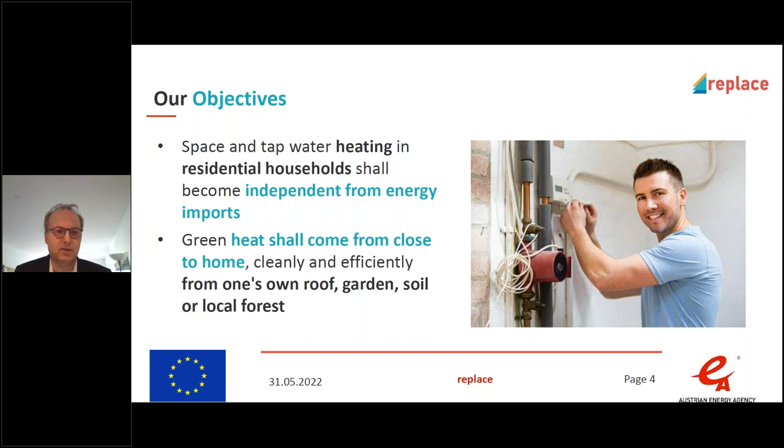The challenge we see is that households need easy access to product neutral know-how to enable them to take informed decisions and to end their dependency on imports.

What we can offer from our project is quite relevant now, because we have an energy crisis and many homes and families are quite worried because of the price increases for the heating supply, and that really affects fuel oil and also natural gas. And with natural gas, there is also a supply security crisis. So what we hear and see is that many families are really worried, and they need reliable information on suitable clean alternatives. They also need information on the costs, financial viability, and on any financial support they can get.

Therefore, our project developed a lot of materials and tools that give advice to enable informed decisions. Here are the most prominent tools and info materials we developed which are already available, ranging from heating matrices to a calculator for techno-economical assessment, which I will show later today. We have handbooks for end consumers and for professionals, and we have a lot of best practice examples from the pilot regions.

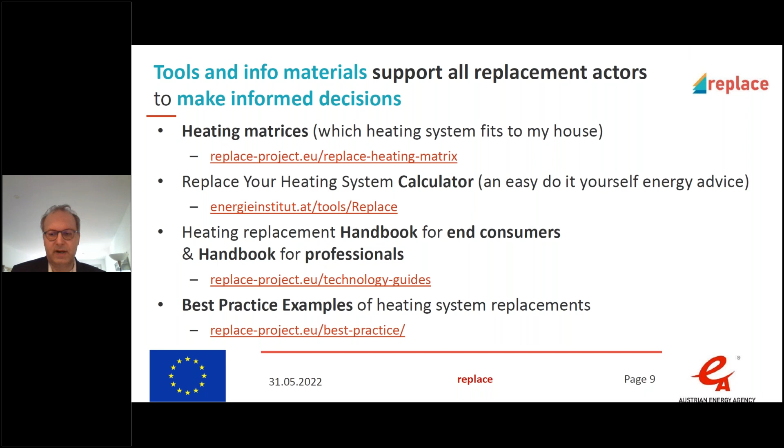Yes, we have 9 pilot regions in 8 countries, and all tools and materials are available in national languages, most of them also in English, meaning translated. These pilot regions have in total more than 8 million inhabitants.

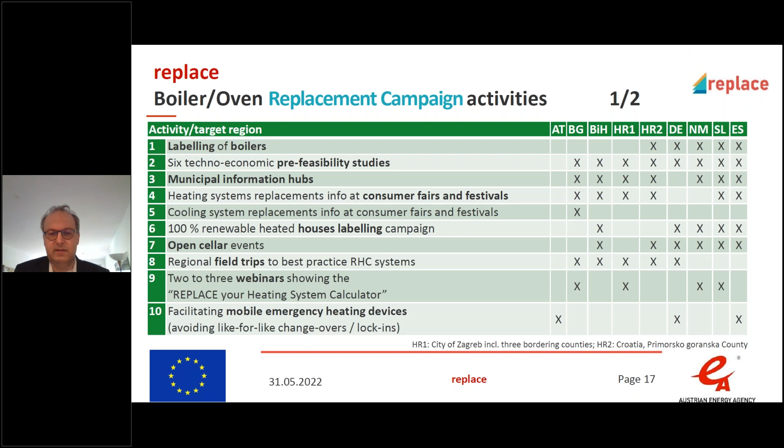We are facilitating mobile emergency heating devices that help bridge over breakdown situations for some weeks, enabling end consumers to take informed decisions.

We also help people develop new business models. Installers can become contractors, or contractors and installers can collaborate with each other.

We have collective actions implemented in all regions, and in Austria we have a one-stop shop for boiler replacement in the province of Salzburg that offers an all-round carefree package for boiler replacement. There are also a lot of other instruments and activities, for example information evenings on municipal level, which is also a good option.

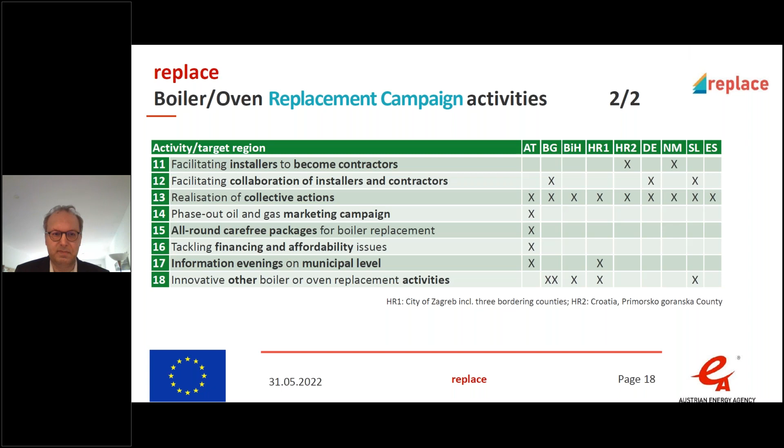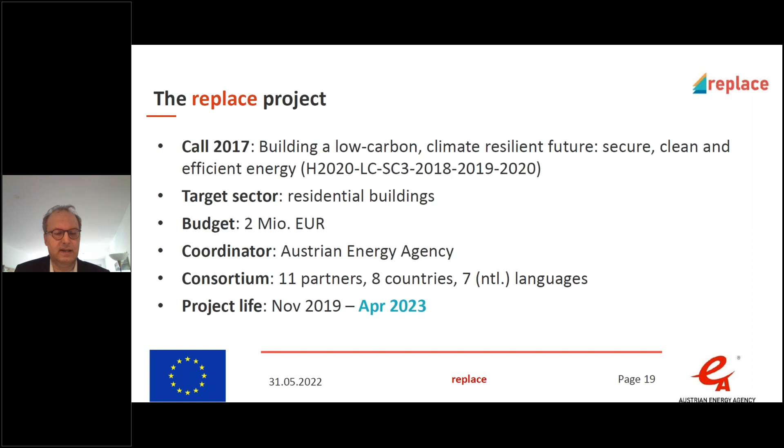Our actions are performed until April next year, and this is what I wanted to show you about what we are doing. I hope you find the workshop interesting and informative. Thank you for your attention.

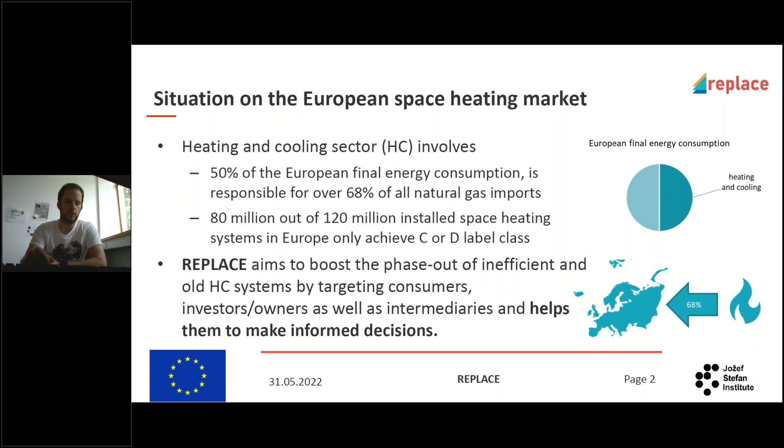The Replace project therefore aims to boost the phase-out of inefficient and old heating and cooling systems by targeting consumers, investors and owners, as well as intermediaries like installers, plumbers and chimney sweepers, helping them make more informed decisions.

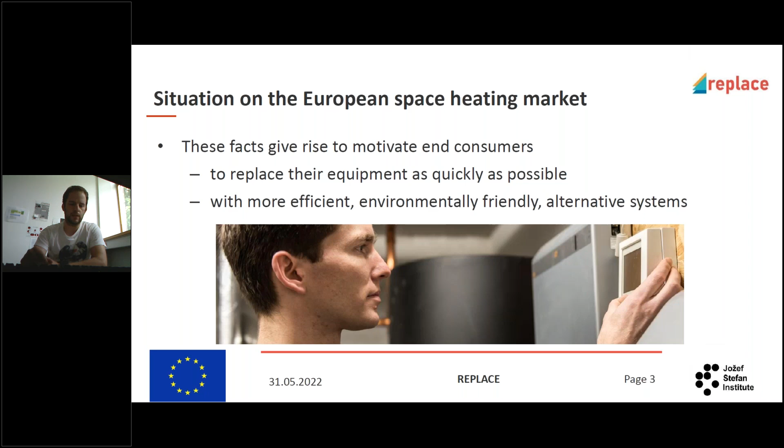Facts regarding the high share of inefficient boilers, the need for fossil fuel replacement, and energy independence motivate end consumers to replace their equipment as quickly as possible with more efficient, environmentally friendly alternative systems. This is the point where the Replace project comes to aid.

The first overall objective of the Replace project is to implement targeted campaigns to make heating and cooling for European consumers efficient, economically resilient, clean, and climate friendly. All activities proposed by Replace aim to inform and motivate consumers to replace their old and inefficient heating and cooling systems with better, greener alternatives, with the benefit of monetary savings and improvements in air quality, comfort, safety, and security of supply. The project focus is on the residential heating sector.

It is coordinated by the Austrian Energy Agency and runs until April 2023. The geographical focus of Replace is in Western, Central, and Southeastern Europe. The consortium today consists of 8 regions covered by 11 partners.

As already mentioned, Replace targets over 1.3 million consumers directly, with an estimated direct impact of 8 gigawatt hours of primary energy savings per year, and a reduction in annual greenhouse gas emissions of approximately 3,600 tons of CO2 equivalent.

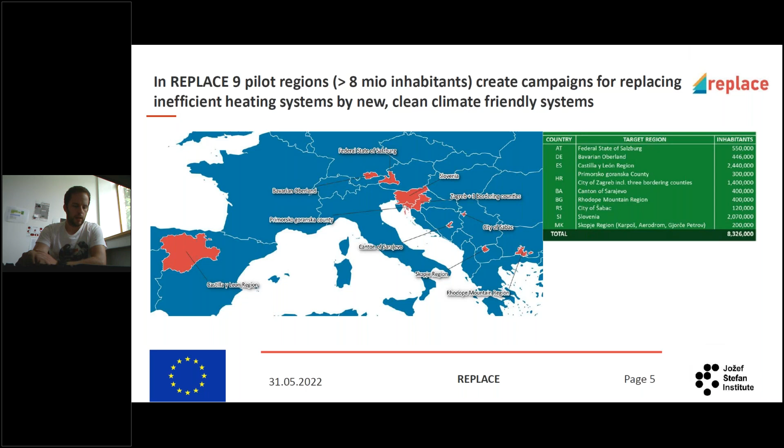To actually transpose the project's objectives during and beyond the project life, every project partner establishes and cooperates with local working groups, which comprise local and national key stakeholders residing in their target region. Key members of local working groups firmly committed themselves by letter of support at the beginning of the project to actively support the implementation of project findings in their target regions.

All consortium participants can rely on their strong local networks and are perfectly placed to steer the work of the local working groups. Key members and project beneficiaries, jointly with other key stakeholders of the local working groups, developed and are currently implementing comprehensive, targeted, oriented replacement implementation campaigns.

One of the most important results of our project are the tools that can be used to aid the decision-making process when replacing an inefficient heating system. The Replace heating matrices provide an initial overview. They show which type of heating system, based on renewable energy sources or connection to district heat, is most suitable for single or double family houses or for larger volume buildings. What kind of system is recommended depends on the thermal quality of the considered building, for example the useful heat demand in kilowatt-hours per square meter per year according to the energy performance certificate.

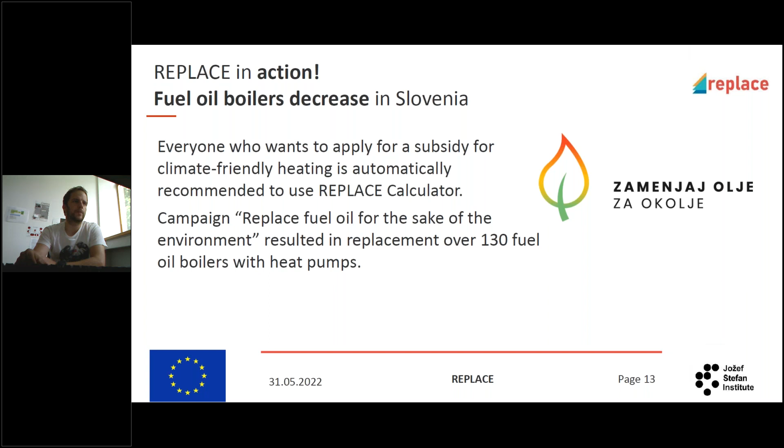I have to say I'm always very impressed and amazed by what we, or our project partners, did in their regions. I really think we have created some measurable and good impact, which is really the main goal of doing this kind of project. So it's good to see that Replace is not just a name, but things are being replaced, mostly inefficient heating systems. So thank you very much.

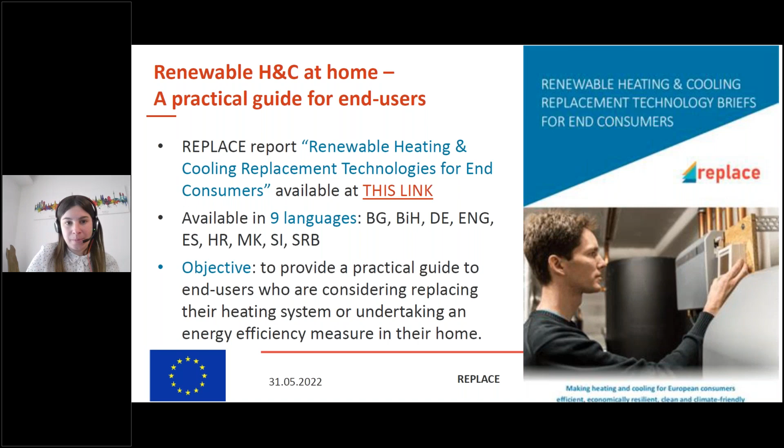Clearly I cannot go through the whole report right now, but by giving you a sneak peek of what's in it, I hope to catch your curiosity so you'll go to the Replace website to download it. In the report you will find the basics of the benefits of replacing an old, inefficient heating system with an innovative renewable one — economic, environmental, and social benefits.

You will also find tips on the steps every end user should take before and during the replacement process to do it the right way. There's a section with frequently asked questions from end users about replacing their heating system, with all the answers included. And last but not least, the report also includes some nicely illustrated fact sheets.

These fact sheets present all the renewable heating and cooling technologies currently available on the European market for the residential sector. The technologies covered in this report, and in the Replace project generally, are biomass boilers for wood pellets and logwood, biomass heating systems with wood chips, modern wood stoves and pellet stoves, electrical heat pumps, solar thermal systems, photovoltaic systems for heating, renewable cooling, multifunctional facade systems, and a chapter on other heating options like collective actions, shading and insulation measures, and infrared heating systems.

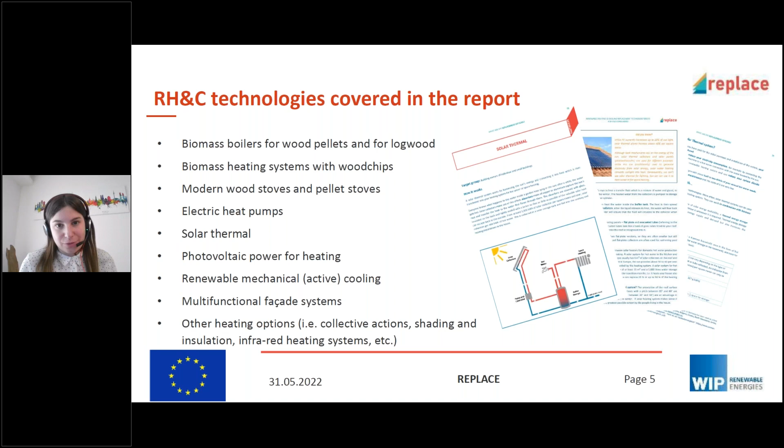You can see from my slide how the technology fact sheets in this report for end users look — nicely illustrated, showing how the technology works and giving additional information on each of these technologies.

Here I just wanted to show you the overview of one of the chapters of this report. One of these chapters focuses on the different phases of the replacement process, the phases that an end user who wants to replace his heating system should undergo. All the phases are then explained in more detail in the report, but I will try to keep it short here.

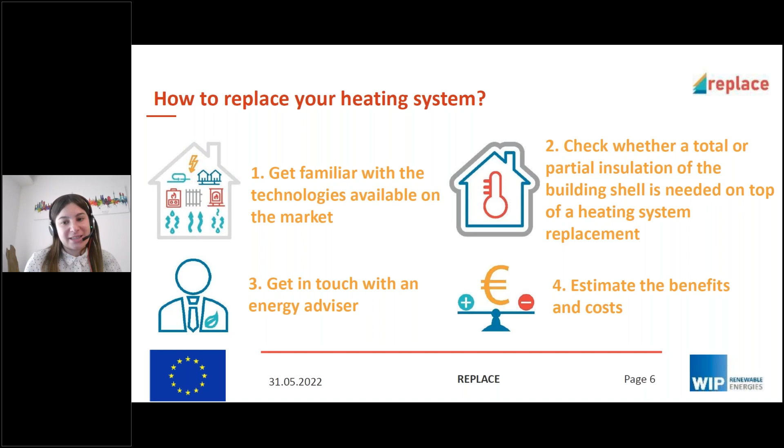If you decide to replace your heating system, as a first step you should get familiar with the technologies available on the market, and the report is very useful for that. Then you should check whether a total or partial insulation of the building shell is needed on top of a heating system replacement. You should get in touch with an energy advisor for in-depth consultation, and estimate the benefits and costs of the replacement.

You should contact an installer to do the practical job. You should apply for regional and national incentives, which are now available in many countries and regions across Europe, in order to incentivize the replacement of old and inefficient heating systems. And last but not least, enjoy your new heating system and tell your friends how cool it is.

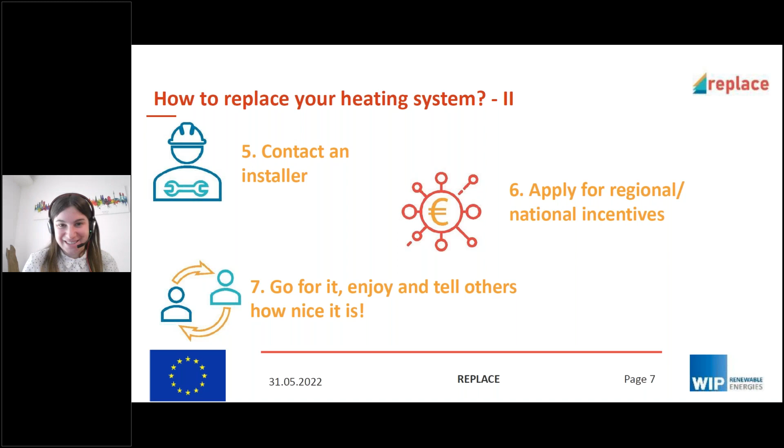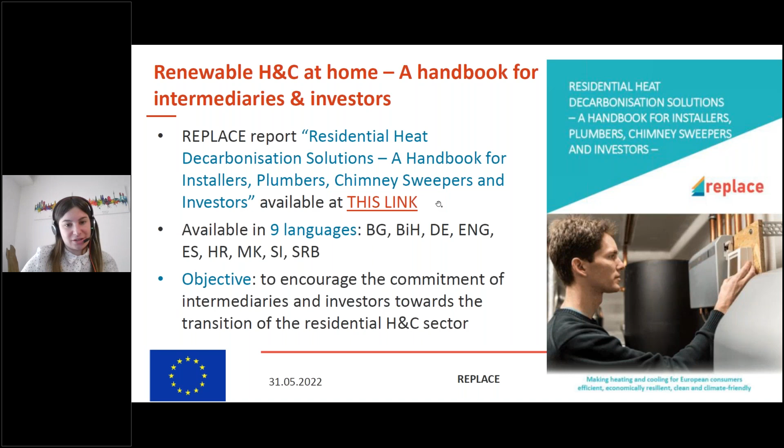The second report I want to present is the handbook for installers, plumbers, chimney sweepers, and investors, which is also available in 9 languages on the Replace website. The objective of this report is to encourage the commitment of intermediaries and investors towards the transition of the residential heating and cooling sector.

The report addresses intermediaries, by which I mean installers, chimney sweepers, plumbers, building developers, and energy advisors. The idea is to provide intermediaries with in-depth knowledge of the renewable heating and cooling options available on the market today in Europe. The report also provides tips for intermediaries on how to communicate the benefits of a replacement process to their customers.

The report also addresses investors in one of its sections. By investors, I mean financing institutions, public authorities, energy suppliers, and homeowners. Investors are provided with information about economic issues, best practices, innovative business models, and model contracts for renewable heating and cooling solutions.

In this report, again, I cannot read the whole thing right now, but just to catch your curiosity, the report includes tips to intermediaries on the replacement project phases. While the previous report addressed end users and their phases of the replacement process, this one addresses intermediaries and the phases of the replacement project for them.

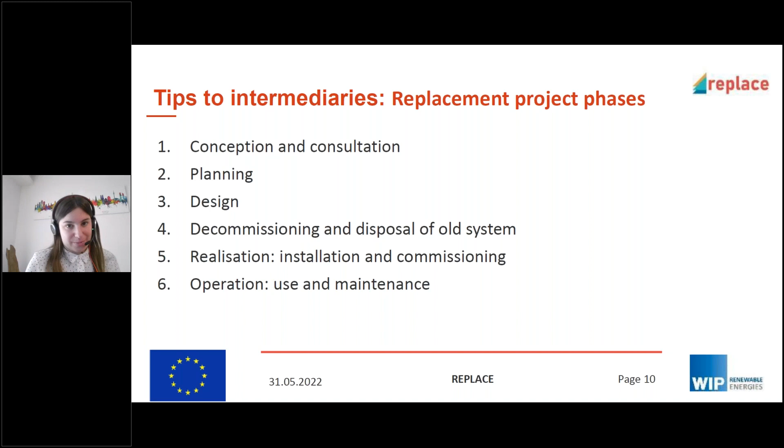The first step should be conception and consultation with the end user, planning of the replacement project, and design. Then comes the decommissioning and disposal of the old heating system, installation and commissioning of the new heating system, and finally the use and maintenance of the new heating system.

The report, as additional tips, also includes a chapter on failures that intermediaries and installers should avoid when replacing a heating system, and the common mistakes often made during the replacement process. The report goes into much more detail on each of these failures and common mistakes.

Just to mention some of them: sometimes the newly installed system has the wrong size. Sometimes intermediaries disregard the quality of the heat distribution water and the importance of hydraulic balancing. Sometimes they do poor ductwork installation, insufficient drainage, inadequate inspection, or insufficient refrigerant charge.

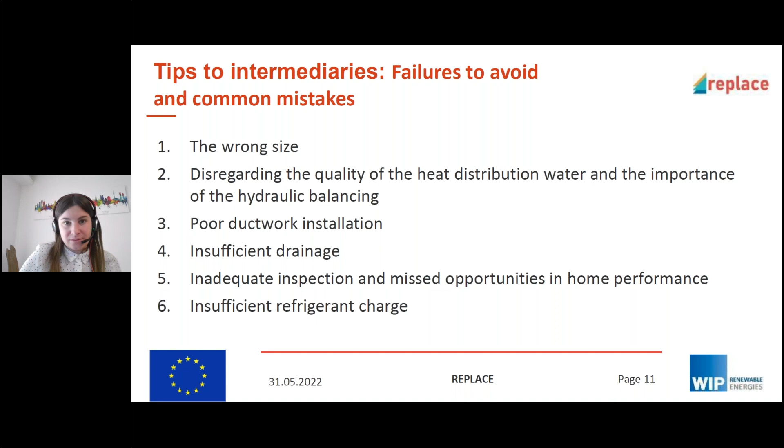The fact sheets also include planning guidelines and recommendations for installers on which technologies match with other technologies, because sometimes, for example in the case of solar thermal systems, they are supplemented by a biomass boiler. The fact sheets also include a list of selling points that intermediaries could tell their customers when trying to sell a renewable heating system.

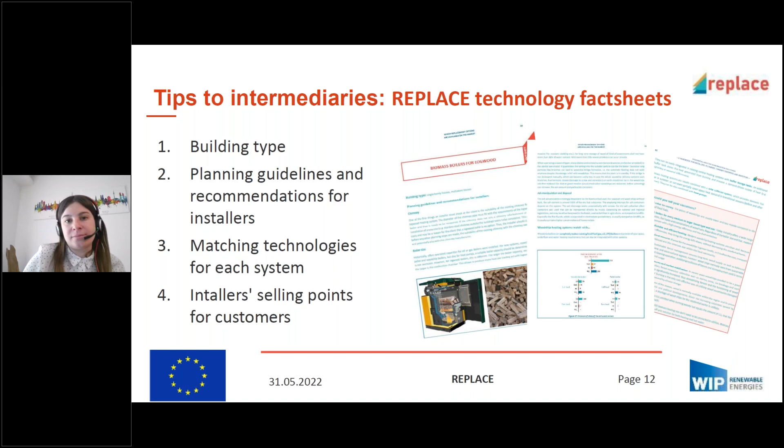As I said at the beginning, there is also in this report a section dedicated to investors. In particular, the chapter dedicated to investors explains some of the reasons why investors should invest in renewable heating and cooling systems.

Just to mention a few of them: investing in renewable heating and cooling systems brings economic return up to 8 times higher than the initial investment. Then the instability of fossil fuel prices, mentioned at the beginning of this webinar, is now really a global and urgent opportunity to accelerate the shift to renewable energy.

Investing in renewable energy could bring up to 63 million new jobs by 2050 in Europe. It is safe to invest in renewable heating and cooling because the regulatory framework at EU and national level is becoming always more stable and more favorable towards renewable systems, also providing many financial incentive schemes.

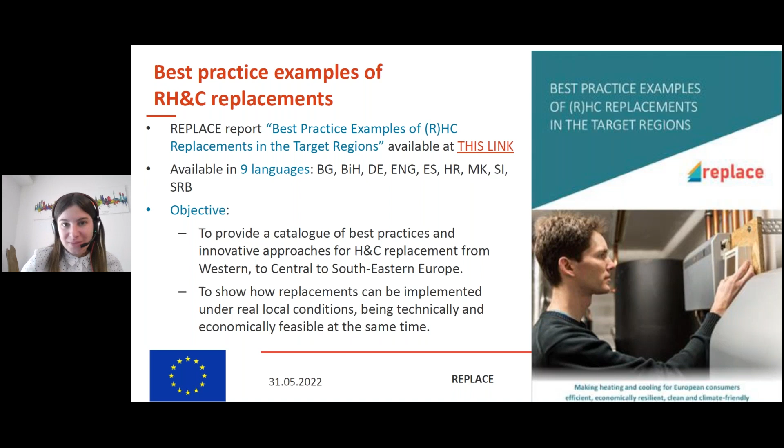There are several types of best practice examples illustrated in the report, from residential building refurbishment to heating and cooling replacement, to demand response and collective actions, to innovative approaches like utilizing mobile heating units or innovative building renovations.

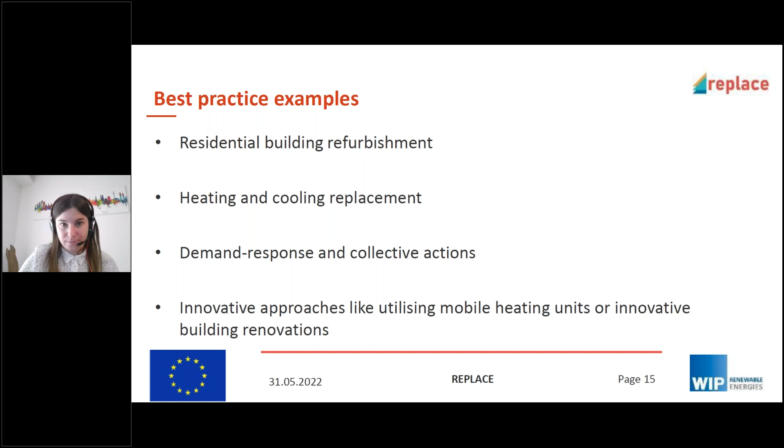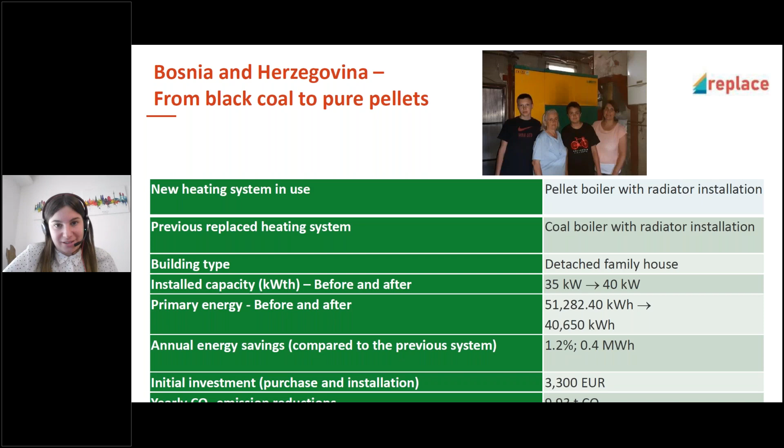In the next slides, I just show some of the examples included in the report. I will not go into detail of the numbers here, but just to give you an idea, for each best practice example we explain in which building the replacement or initiative was undertaken, what was the previous installed capacity, what were the previous costs, and what are the energy savings with the new system.

So I just report 3 examples here from Bosnia, from Slovenia, and from Germany. But there are more than 30 examples in the report, so that's also an interesting read.

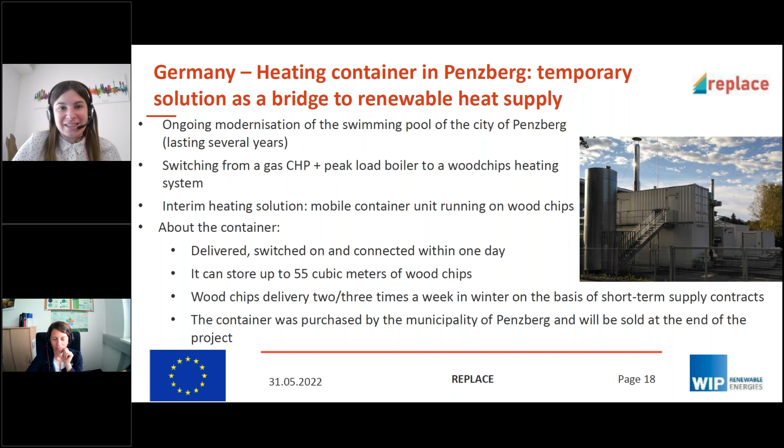I hope that with this presentation I increased your curiosity to go and have a look at the reports on the Replace website. Thanks for listening, and if you have any questions, I'm happy to answer.

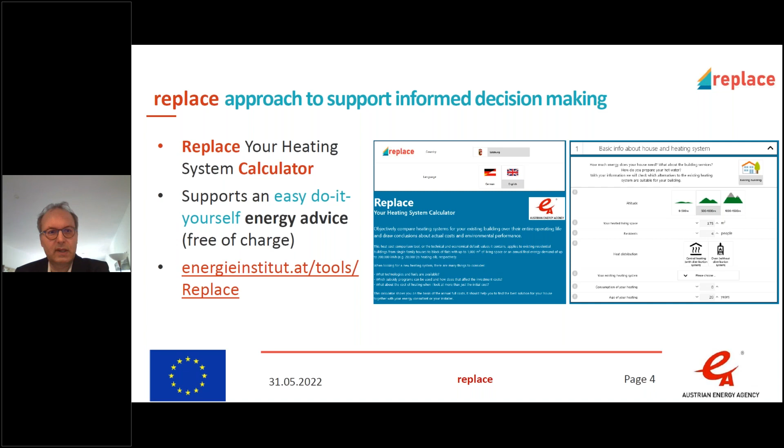The scope of the tool is to give orientation and enable informed decisions in the residential heating sector for consumers, investors, and owners of buildings. It facilitates the replacement of an existing old fuel oil, natural gas, electric, coal, or logwood heating system, whether boiler or oven, depending on the region, these being the types of systems common in the pilot regions. The tool helps assess the switch to a new, clean, climate-friendly solution and shows the costs of such a switch.

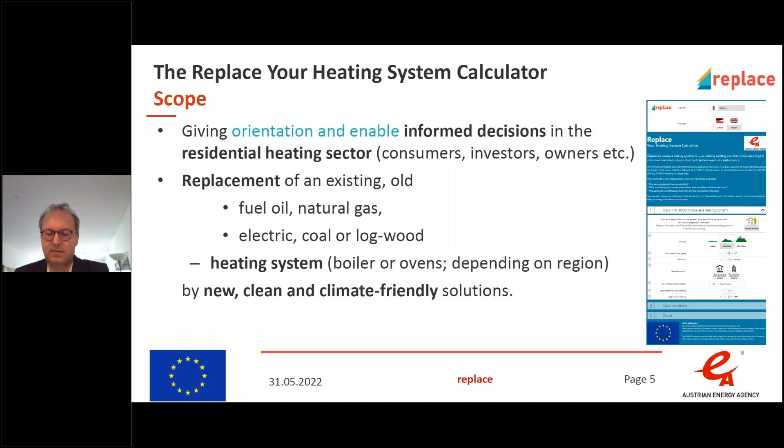The calculator is based on an existing Austrian calculator from the Ministry for Climate Action called Hexit, as in the exit from heating oil. We made an update of this calculator, which was originally only made for Austria. Now the tool works for 8 European countries, in 7 national languages, and for every country there's also an English version available.

You do not have to know anything when you use this tool, no technical or economical background is needed. This is enabled because the tool has default values behind it. In the back end, there are default values for every region that apply for renovations in residential buildings, ranging from single-family houses to blocks of flats. These default values enable you to assess even larger buildings that consume up to 20,000 liters of heating oil equivalent per year.

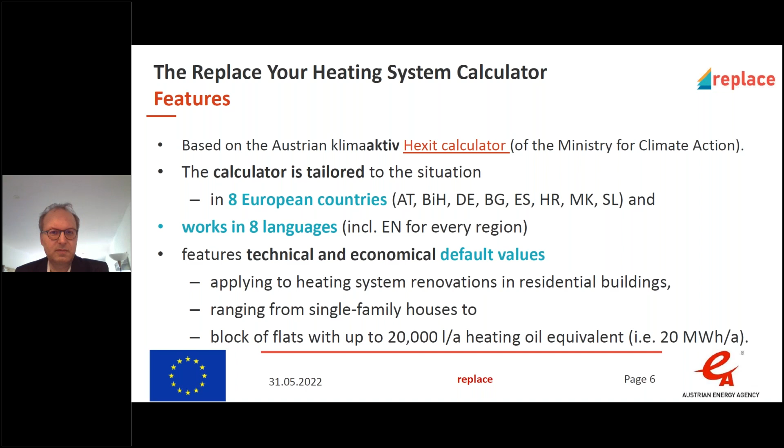So that's the range of the tool. When users consider a fuel switch, they have many questions: which technology and fuels are available in my situation, what subsidy programs can be considered, how does this affect costs, and what about the cost of heating when I look at more than just the initial costs?

The calculator gives answers to all of these questions, and the cost question is answered by annual full heating costs. So the tool does not just compare fuel costs, it also includes investment and available subsidies, helping you find the best solution for your home.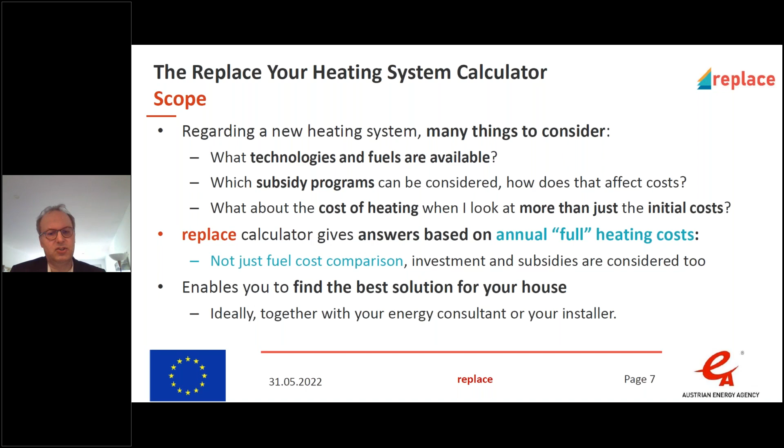Ideally, you would use the calculator together with an energy consultant or an installer, because then you get more accurate results. But for a quick check, I think the tool is really helpful. In the quick mode, which needs no previous knowledge from the user, you can get results in just 3 steps.

In the first step, you define some basic info about the home. You only need to know the actual energy consumption of the building, for example how much fuel oil you consumed last year, say 3,000 liters, and you enter this figure. Then you choose the type of heat distribution system, whether a radiator, floor panel heating, or the like, and what hot water preparation system you have, whether heated by the main heating system, an electricity heater, or a solar thermal plant.

In the second step, you choose options regarding the fuels available: is there a connection to the local district heating network possible, shown via icons; is there accessibility for a pellet lorry; is there enough space in your house for biomass fuel storage? Once you answer these questions, you automatically move to the third step, the results section.

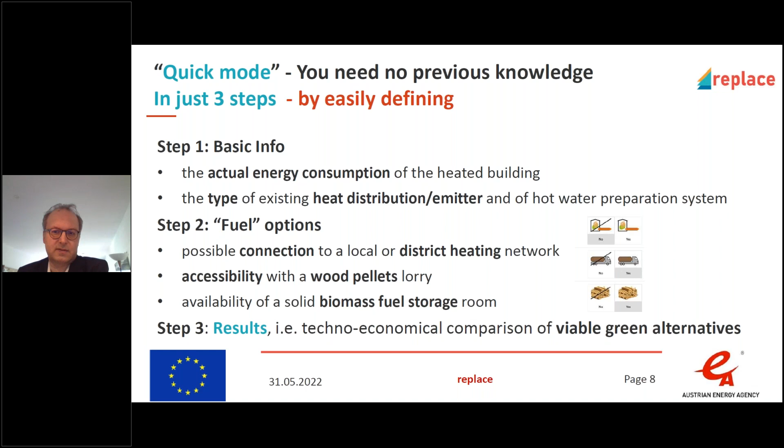Then you see a ranking of the costs of viable green alternatives, shown on the right side of the slide. You see the possible green heating technologies together with the annual heating costs, ranked from the lowest to the highest heating costs per year.

You can also see this via the bars. The first bar, from green to red, shows you the investment costs including subsidies for the new heating system. Then you see the annual cost savings compared to the existing system, the annual CO2 reduction of the new heating system compared to the old one, and also any comfort improvements, for example if you switch from a biomass boiler to a pellet boiler.

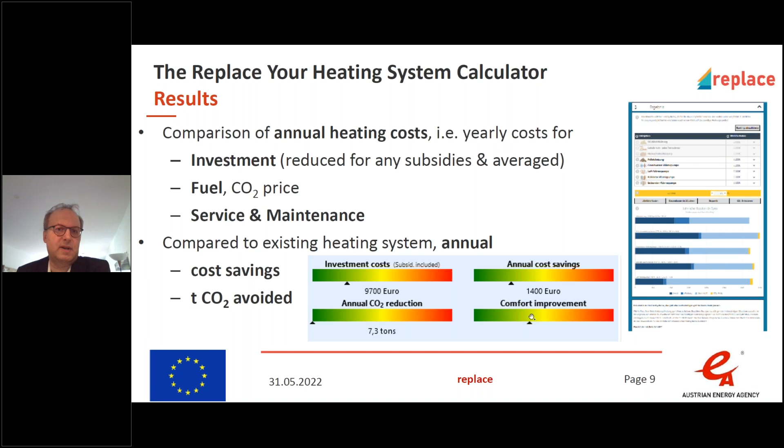So that was the quick mode. The tool also features an expert mode.

So if you expand, for example, here the results for the pellet boiler, annual costs of nearly 3,000 euros in Austria was this example. Then you see here a lot of information. As I told before, you can also download some PDFs that are basically the information from the handbook that Benedetta showed before.

The further adjustments in the expert mode allow you to adapt the default values, so you can enter here the investment costs, for example, based on real offers of the new heating system. You can enter here subsidies if you know the exact figure. You can enter here the fuel costs of the old system and of the new system. You can enter here price escalation rates for the new fuel, and you can enter here the service and maintenance costs of the old and the new heating system.

So you can do this for all technologies, and that allows you to get exact figures.

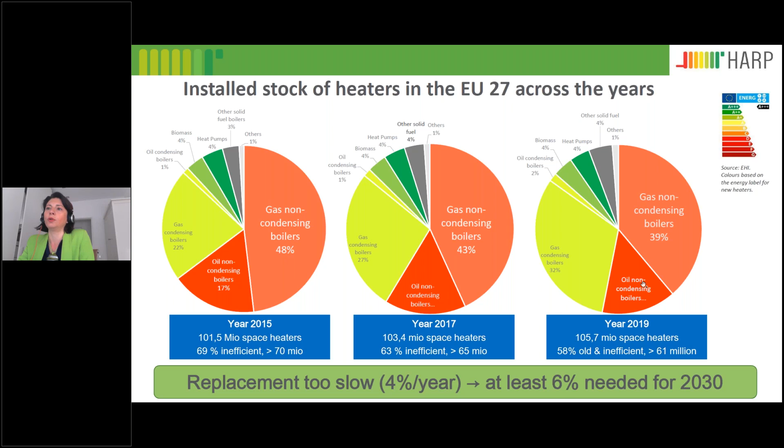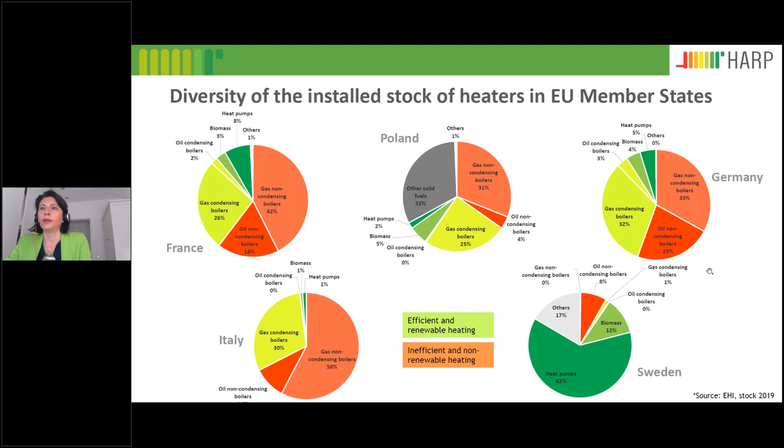So we've analyzed what the challenges are to a faster replacement rate, and this is where HARP really comes in, or tries to work on at least one of them. The first one is certainly the low consumer awareness of how energy efficient their appliance is. The fact that you don't have an energy label, but only get one when you go and buy a new appliance, is one issue that is blocking or slowing down this replacement. I think everybody has a personal history that can exemplify that.

I don't know how many times you yourselves have changed your boiler or whatever you have at home, but certainly when I talk with family and friends and ask how efficient their heating system is, they don't even know what heating system they have. So I think that shows very much that low consumer awareness is a barrier.

There's also other issues like the capacity and capability of the installers of heating systems to drive that change. So there we have a gatekeeper that's also a roadblock. A lot of the technologies that we put on the market as industry are difficult to be installed by the classic installer. So there's a need of reskilling this huge workforce, but also increasing the number of installers. Personal experience again, it's always extremely difficult to find an installer.

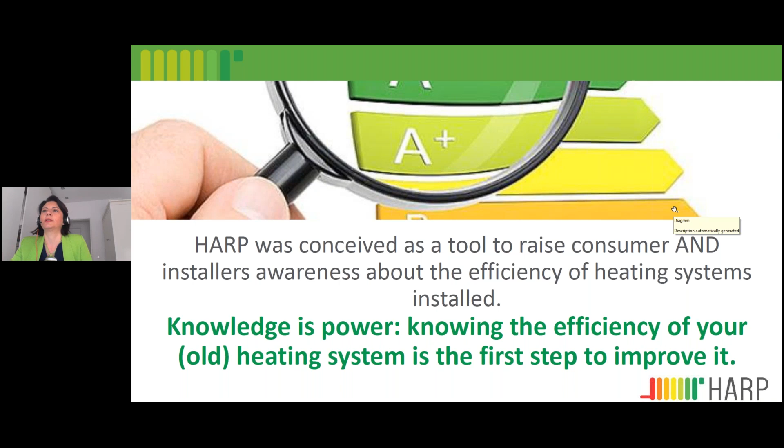These are really the two target audiences we had as HARP. It was conceived as a tool to raise consumer and installer awareness, with the principle that knowledge is power. If you know how efficient your probably old heating system is, you will be pushed to do something about it, and that's the first step to improve it. This is really where we worked on HARP.

We developed this online tool that you can also go check out and have fun filling in. It provides consumers with an indicative energy label. You put in the data of the system you have at home, some specifics of your heating system today, and it estimates what kind of energy label it would have, and gives an estimation of the cost associated with the system.

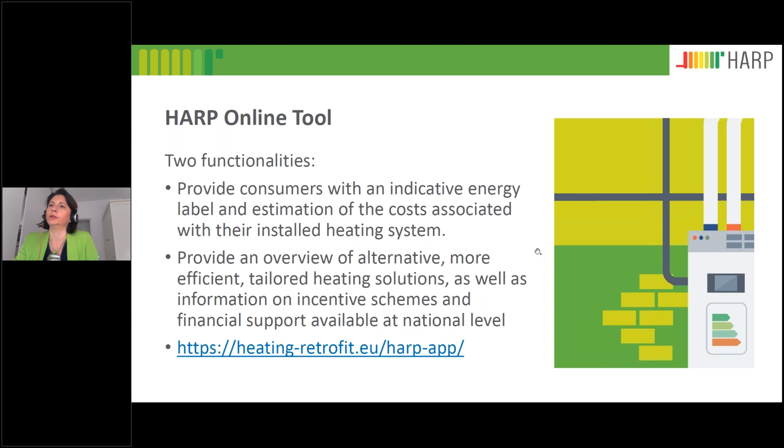But it also provides an alternative, an overview of what alternative systems there are that are more efficient, and gives you information on incentive schemes available at national level, in the countries that are part of HARP today.

This is a bit of an overview. It's quite a quick tool to use, like a quick app, so it takes about 5 to 10 minutes. We have done 2 different versions of it, again to underline the 2 avenues to reach the consumer, either directly or through a professional. It's at the moment available in 6 languages: English, French, German, Italian, Portuguese, and Spanish, reflecting the countries participating, plus English.

We are towards the end, so we can draw some conclusions from some of the countries, though we're still finalizing for the rest. As a first project outcome in Italy, one of the participating countries, we had a first campaign between March and June 2021, and a second one in autumn of last year with the complete version of the tool. Overall we had positive feedback, particularly from the associations of professional installers in Italy.

There were training sessions organized for installers, designers, and architects, who all have a role in counseling end users. This was perceived as a useful tool to make consumers aware of the inefficiency of their installed appliance.